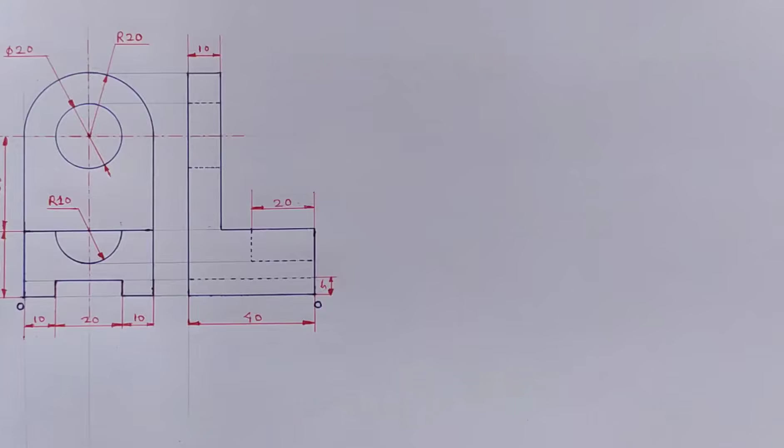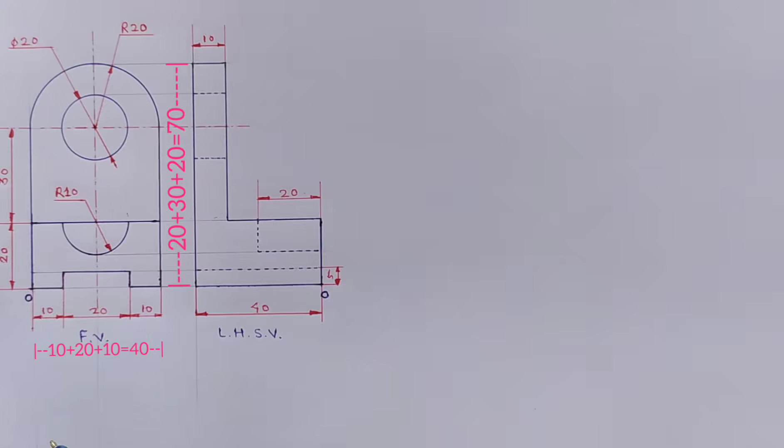In this video, we will solve one more problem in isometric views. These are the given orthographic views. This is front view and this is left hand side view. The total height of this object is 20 plus 30 plus 20 is equal to 70 millimeters and the length is 10 plus 20 plus 10 is equal to 40 millimeters. And this is the width, 40 millimeters.

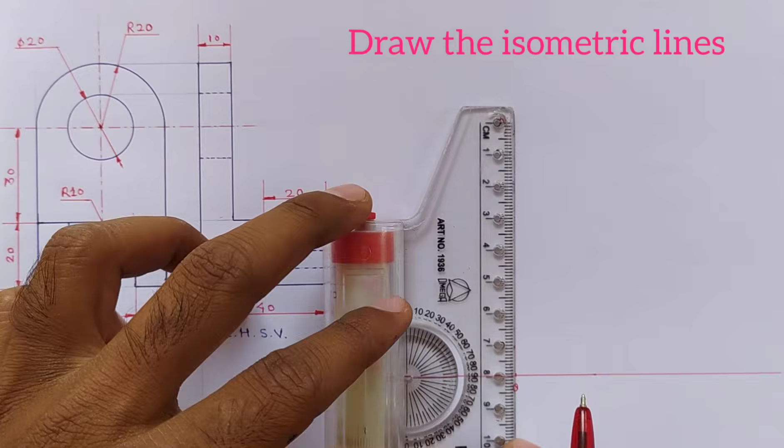Now, we should draw the isometric lines. Firstly, draw a reference line and mark origin point on this line. Then, draw a vertical line perpendicular to this reference line from origin. This is z-axis. Draw the lines with 30-degree angles to reference line from origin to the left side and right side. To the left side, the line is y-axis and to the right side, the line is x-axis.

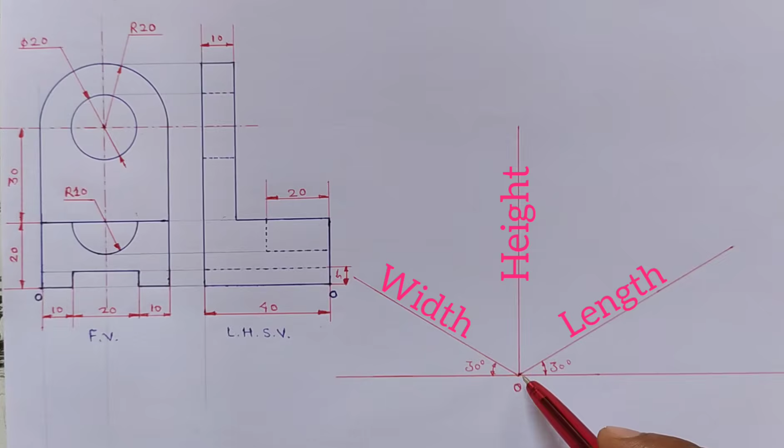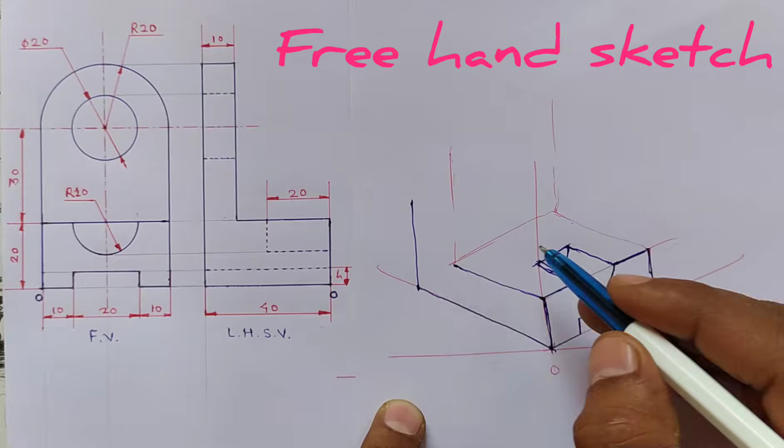This is origin point, so length will come in right side on this line. The width will be in left side, height is in vertical direction. Observe given orthographic views carefully and imagine the actual object from these views. You should draw the rough sketch of the object before actual drawing, like this. So this will be our final object.

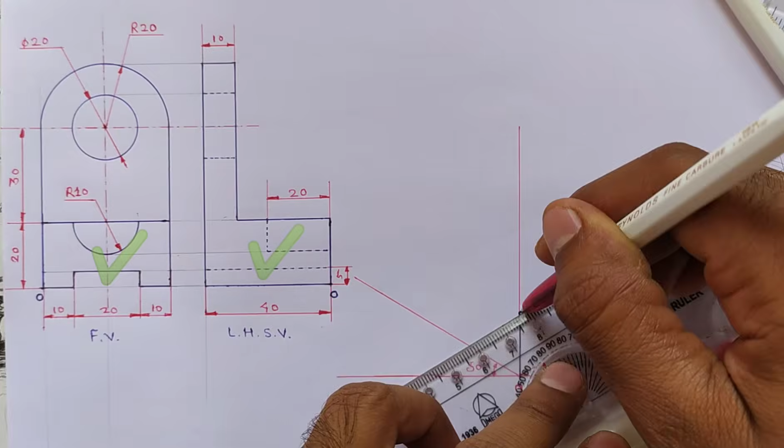Now we will draw the object step by step. Initially we will draw this tick marked portion. Here height is 20 mm from origin. Then draw the line to the right side, similarly to the left side. Then the length is 40 mm. So mark a point on 40 mm. Then draw the vertical line from this point. Then measure 10 mm the left side and right side. Then draw the lines.

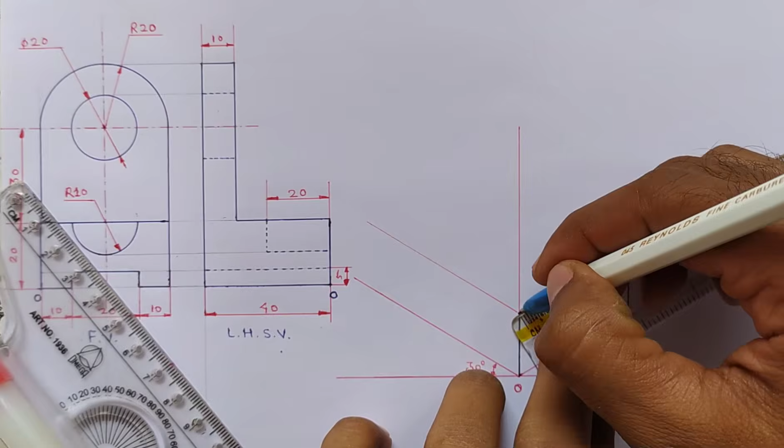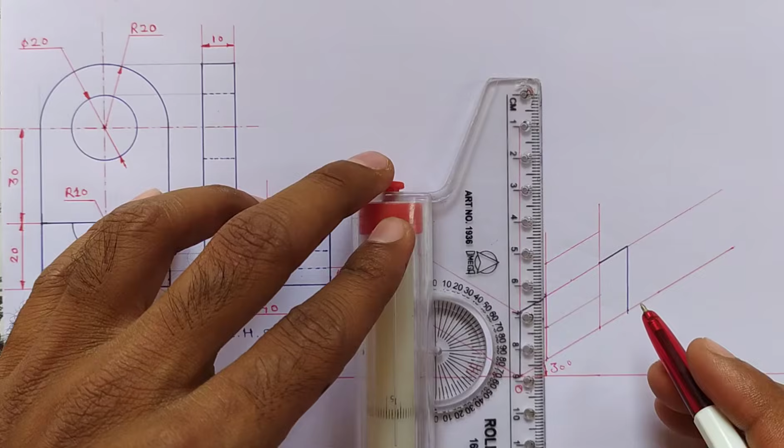There is semicircle in front view, so we should make the isometric square. And the side of isometric square is 20 millimeters because the radius is 10 millimeters. Make the isometric square like this. Then mark midpoints. Join the opposite midpoints from big angle like this. Similarly, join this midpoint. Take this distance into compass and join these two midpoints. Similarly, draw the arc from these two midpoints like this. So, the semicircle is completed.

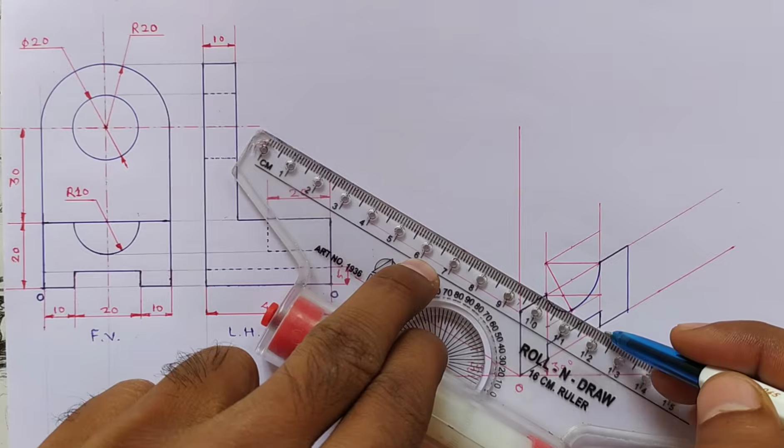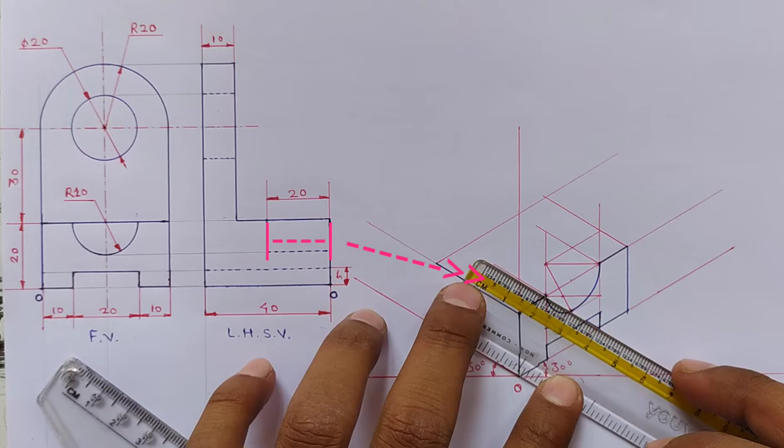Now, we will complete the bottom slot. Here, height is 6 mm. Then, draw the parallel line like this. Again, join this line. Don't forget this line. Here, the width is 10 millimeters from this point. Set scale parallel to this line and draw the line from this point. Similarly, draw the line from this point also. Then, shift these points back. And here, the width is 20 millimeters. Then, draw the parallel line like this.

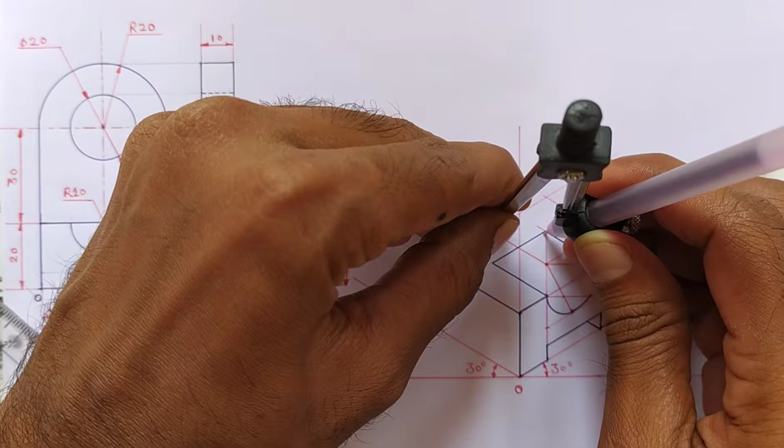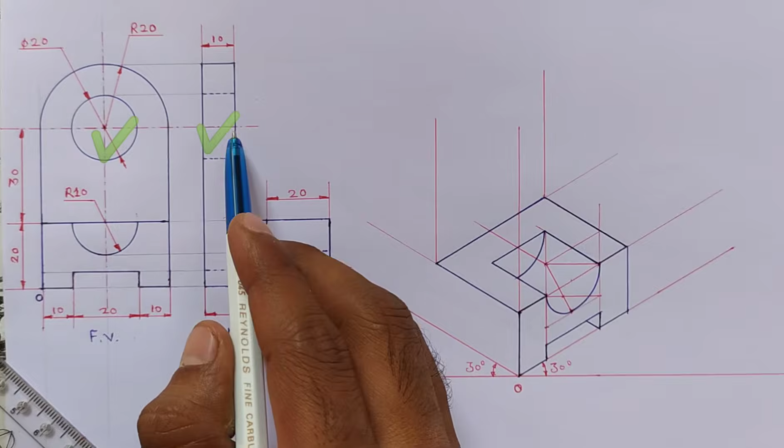Dark this line. Then draw the line from this center point. Take this distance into compass and mark new center point. And take this distance into compass and draw the arc from new center point like this. Dark this line. Again, this line should be dark. Then draw the vertical lines from these 2 points. Now we will draw this tick marked portion. Here the height is 30 millimeters. Same here.

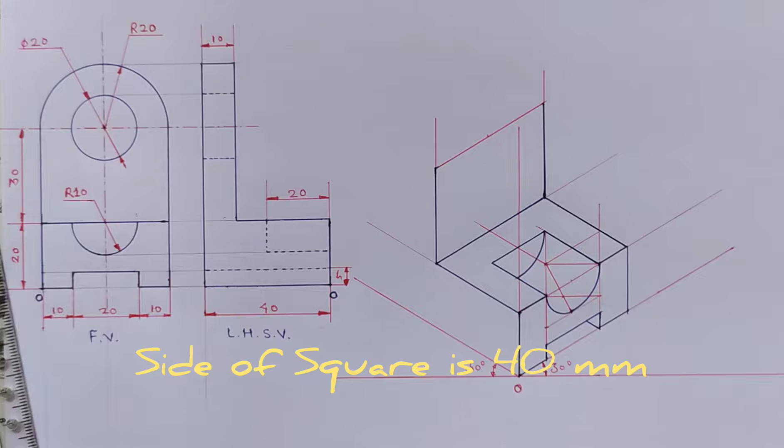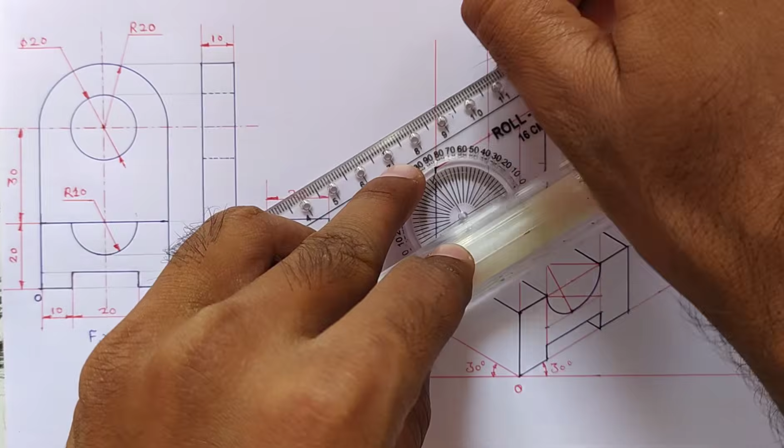Now observe front view. There is semicircle, so we should make the isometric square in order to draw this semicircle. And the side of this square is 40 millimeters because the radius is 20 millimeters. Make the isometric square like this. The isometric square is completed.

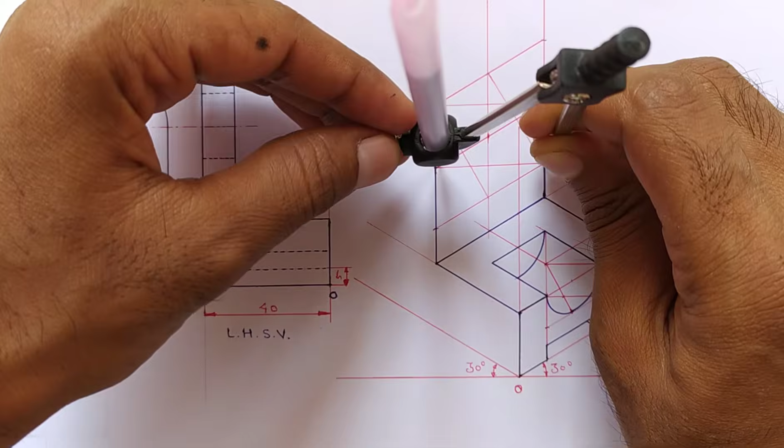Now join the opposite midpoints from big angle like this. We have required only two midpoints because there is semicircle. Take this distance into compass and join these two midpoints. Take this distance into compass and draw the arc from these two midpoints like this. The outer semicircle is completed. Now we will draw the circle.

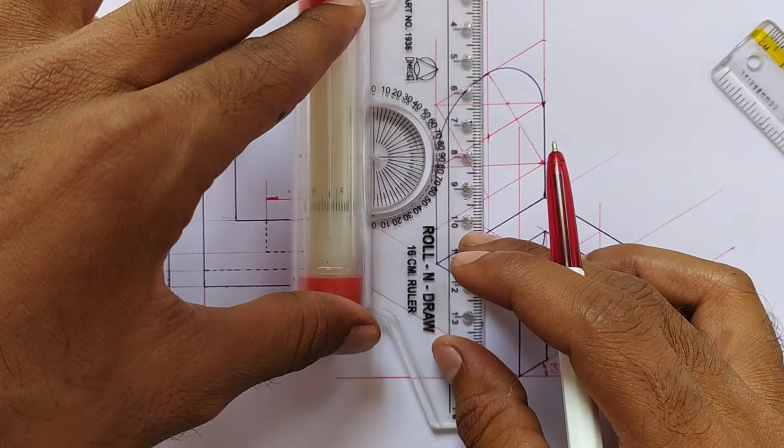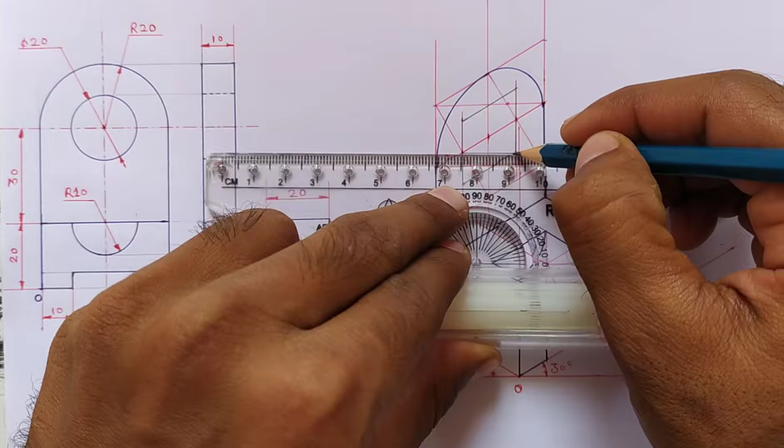We should make the isometric square, and the side of isometric square is 20 millimeters because the diameter of circle is 20 millimeters. Make the isometric square like this. Here the isometric square is completed. Now join the opposite midpoints from each obtuse angle like this. Then take this distance into compass and draw the arc from these two midpoints.

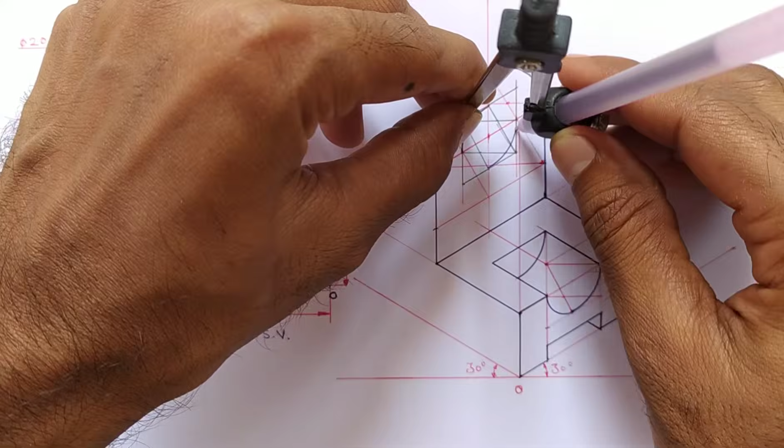Do the same procedure to the opposite side. Take this distance into compass and join these two midpoints. Do the same procedure here also. Here the circle is completed. You can erase the construction work.

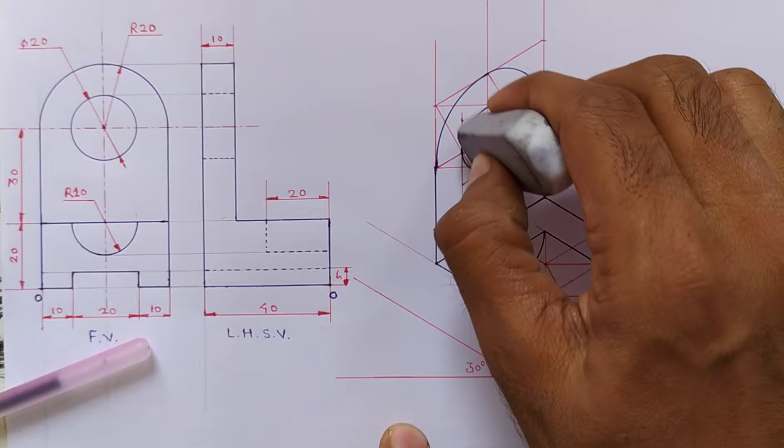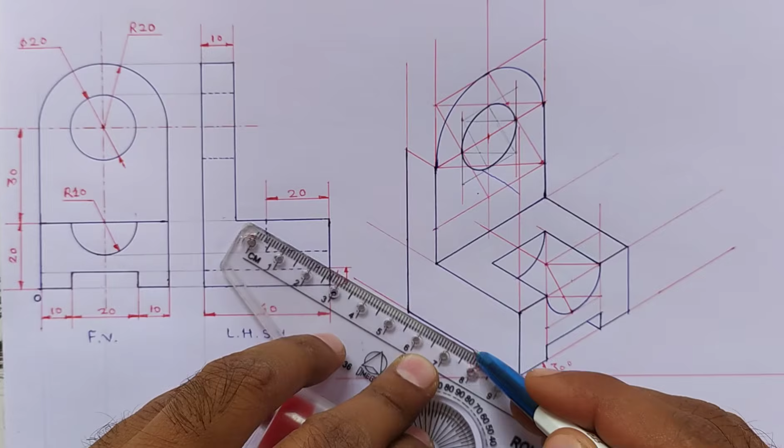Total width of this object is 40 millimeters. So measure 40 millimeters from origin and mark the point. Then draw a vertical line from this point. Then draw a parallel line like this. Then dark these two lines. Set scale parallel and draw the line from this center point. Again draw the line from this center point also.

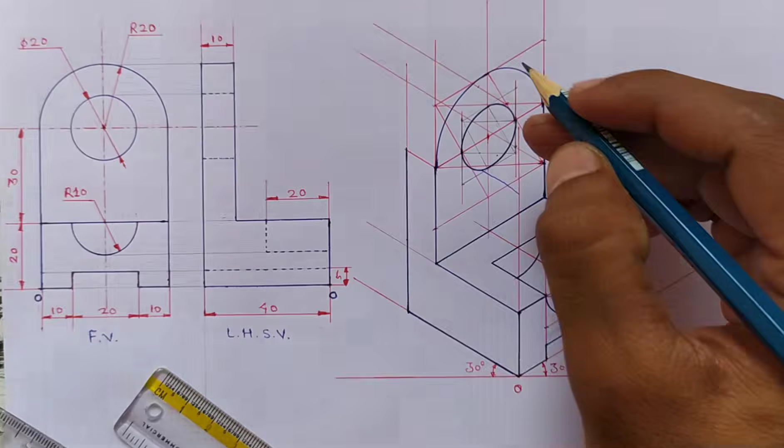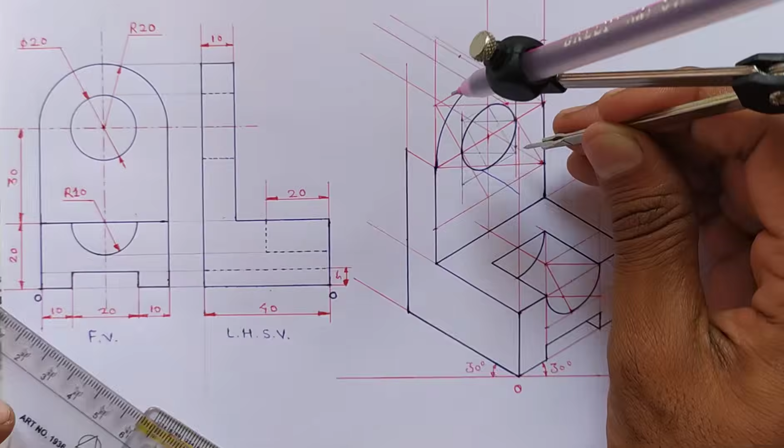Then take 10 mm distance into compass and mark new center point on this line. Similarly, mark new center point on this line also. These are the new center points. Then draw the line from these joining points also and mark 10 mm distance. Then take this radius into compass and with new center point draw the arc like this. Then draw the arc from this new center point also and draw the tangent like this.

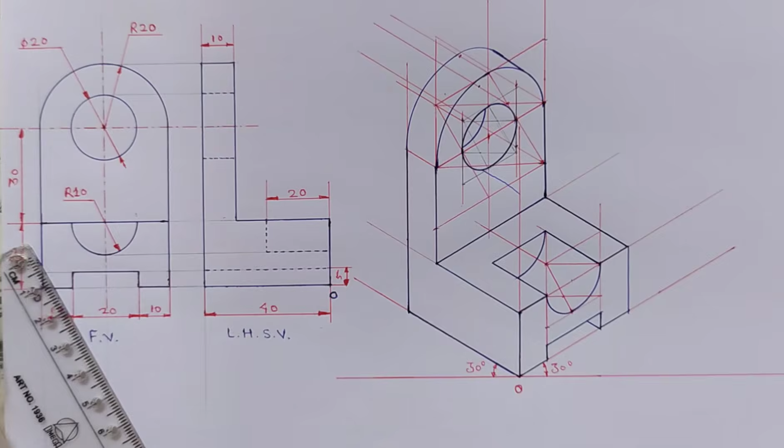Now shift this center point back by 10 mm. Take this distance into compass and draw the arc like this. Here the diagram is completed. Now we should give all the dimensions.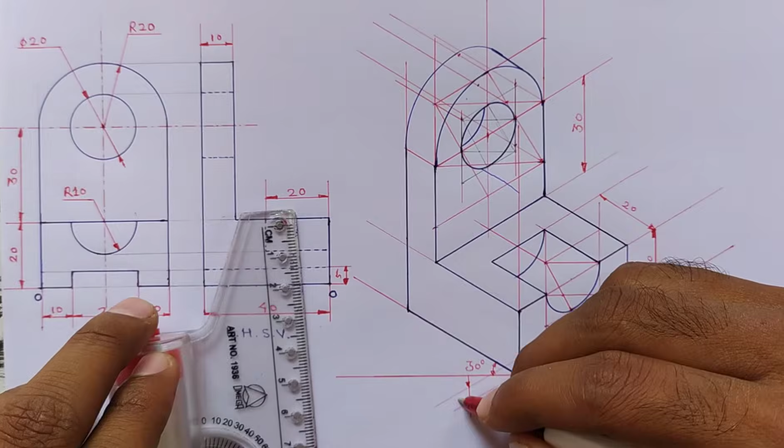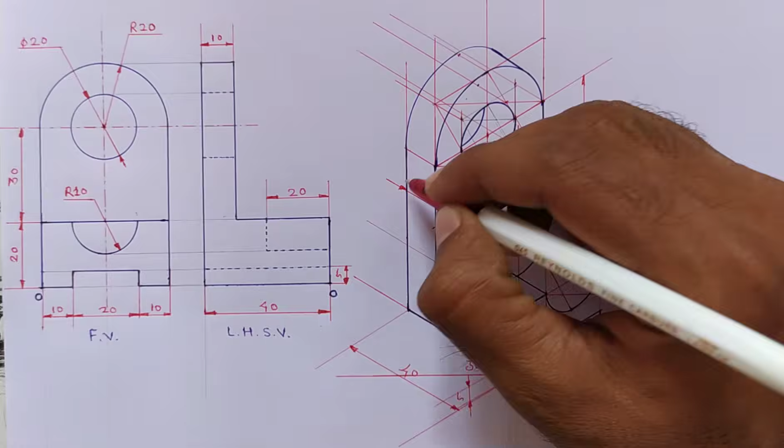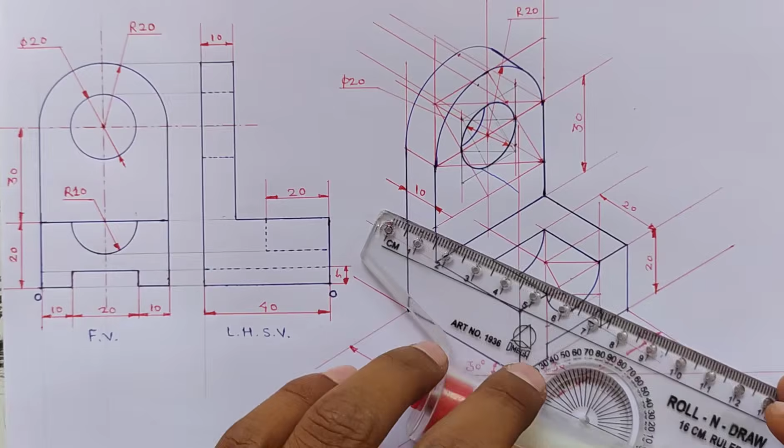This is 20 millimeters. This height is 30 mm. Here this width is 20 millimeters. Again this is 4 millimeters. And the total length is 40 millimeters, 10 plus 20 plus 10. Then the total width is 40. Again here this width is 10 millimeters. This radius is 20 millimeters and this diameter is 20 millimeters. This is 10 mm radius.